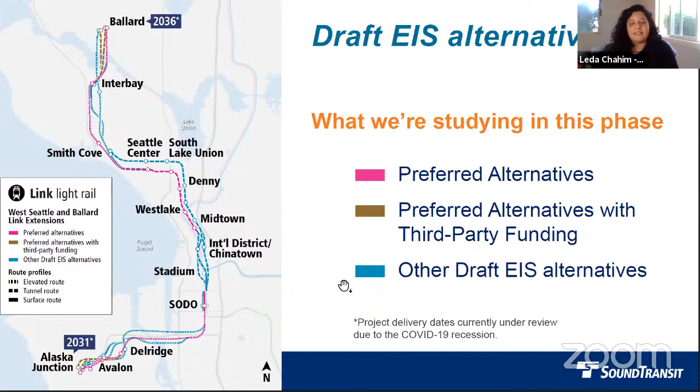I mentioned that environmental review process, the draft environmental impact statement, and that comment period. After that, our board will potentially modify or confirm the preferreds. So you see the pinks through here all along. We also have preferred alternatives identified with added scope elements, such as the tunnel crossing across Ballard, that would require additional funding based on what we knew at the time. And then we have other draft EIS alternatives as well, shown in blue.

We study them all equally in the environmental impact statement. All right, now I am zooming in to the alternatives. There are the three types of alternatives you saw before, but now north is facing to the right. I will start with the pink preferred alternative here.

This alternative exits a downtown tunnel through a portal located on Republican near Elliott. It travels in an elevated guideway north along Elliott, veering west of Elliott to serve a Smith Cove station that is elevated above the Galer Street flyover.

The alternative continues over the Magnolia Bridge, through the Armory property and between the Interbay Golf Course and the BNSF tracks, still in an elevated guideway, and then it goes over the Dravus Street Bridge and gets to an elevated station north of Dravus Street near 17th.

That's the Interbay station. The alternative will then travel northwest up to 14th Avenue Northwest and cross Salmon Bay in a high-level fixed bridge, continuing up to 14th with an elevated station there. That's these boxes here. Okay, that's one.

Then we'll go through the two preferred alternatives that are in brown. Those are the ones with third-party funding. So these are tunnel options under Salmon Bay. They both connect to the pink elevated alternatives just south of Dravus Street, but instead of going over Dravus, they would go under Dravus to have a retained cut station.

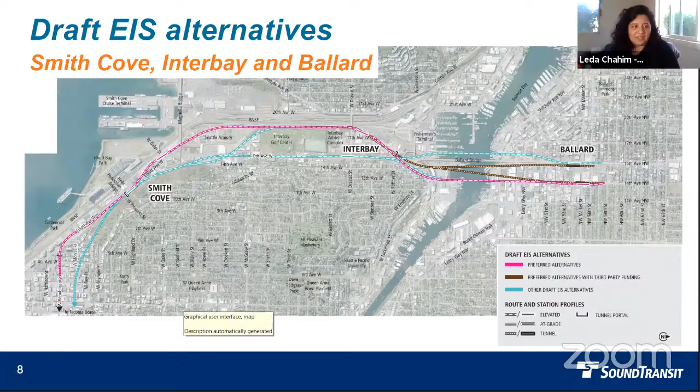For environmental review, I'll be brief since I know I just had 10 minutes, but what is an environmental impact statement? As I mentioned, it provides the agencies and the public an understanding of the environmental consequences and helps with that decision making. It looks at the range of alternatives, potential impacts, and mitigation.

And then for each of those topic areas, we look at that with an environmental justice focus as well. We are partnering with the City of Seattle on a racial equity toolkit for this project.

I will lastly mention our station planning efforts are ongoing. We are very interested in how our light rail stations interact with and support the uses around the station and how people can access those, particularly from various points and key destinations that people have shared with us.

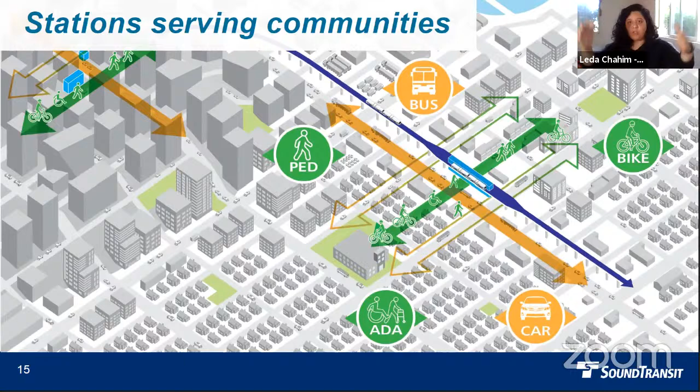We've done a lot of engagement early on this process. We've continued our agency coordination and look forward to more engagement as the draft EIS is published around stations, and next year with our city partners as well that are looking at the broader station area while we're looking at the station and the intersection between. We have lots of ways to engage, and I will just say that we're focused on preparing folks for the draft EIS publication with our online platform and briefings like this one. We'll also be engaging with potentially affected property owners in advance of the draft EIS publication, and are always looking at ways to reach diverse audiences. And then when we actually publish the draft EIS, we'll be looking at lots of different ways to engage folks to receive those comments. That'll be a really important time to engage with us.

Okay, that's everything. Thank you.

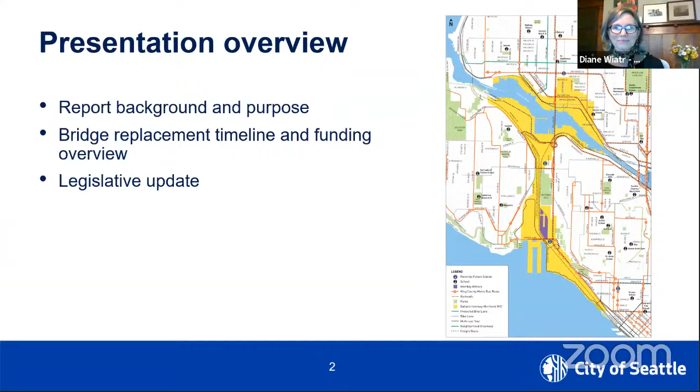All of these folks have a vested interest in the area and a vested interest in the transportation system working well. So we had an interagency team who helped us form the report.

In addition, although it was not required, we did a bunch of public outreach and public meetings. When I started this work, I was able to go to the Magnolia Community Council and have a couple public meetings at the library in Ballard in person. Now that seems like forever ago and kind of dreamy. I look forward to the time when I can be with people again.

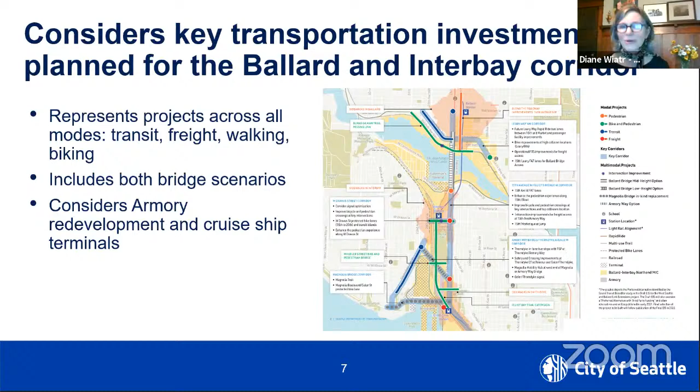In all of our analysis for transportation, we looked at 2 bridge options for each bridge. These came from the work that Wes and Matt were involved in, creating the Ballard and Magnolia Bridge planning studies. We used the low height and the mid height Ballard bridges. Both of these are bridges that open and close. For the Magnolia Bridge, we used the 1-to-1 in-kind replacement and also the Armory Way Bridge alignment alternative, which that community often called the least worst alternative to the 1-to-1 replacement.

The BIRT report does not make a recommendation of a preferred alternative. These 2 options for each bridge that we chose really were based on the best options from both a technical and public support standpoint.

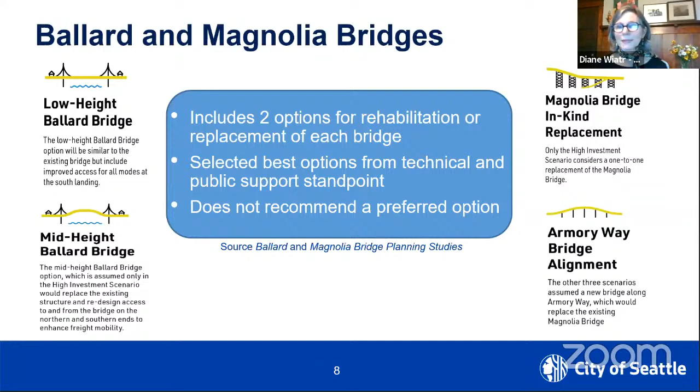The next step is a type, size, and location study. This element is required as the basis for advancing a project to the design and engineering stage, and the type, size, and location study, which takes 12 to 18 months, is required by, I believe, federal law. Matt Donahue can correct me if I'm wrong. But it's the step that takes you to design.

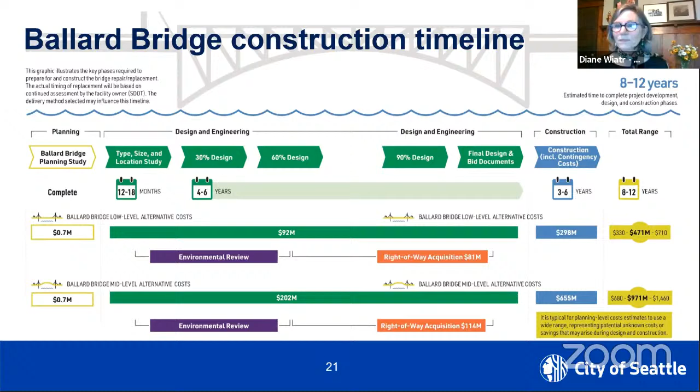We did the same thing for the Magnolia Bridge. For the one-to-one in-kind replacement, the total is about $400 million, and the Armory Way Bridge would be about $266 million.

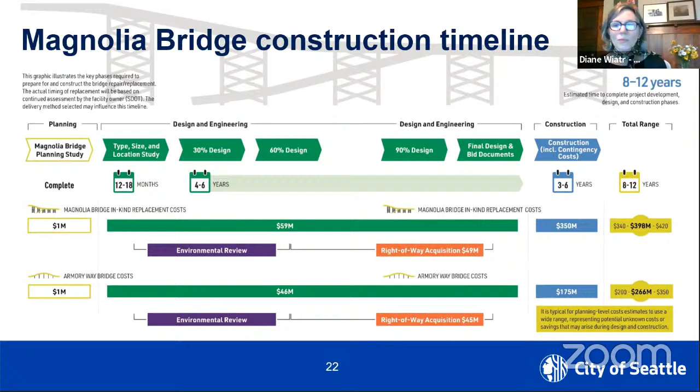The Washington State Legislature asked us to do this report. They didn't provide us any money to implement any of these projects. However, I wanted to say that the report has created a certain amount of buzz. We have briefed council members -- basically city and state elected officials -- and the word about the report and the bridges is more pronounced now.

Large bridge projects like Magnolia and Ballard, cities can't afford to pay for them themselves. We will require federal funding and state funding. And so the report is a good step to getting us there.

I have to say that your state legislators should be commended for working really diligently this session. They initially had $54 million in the budget, both in the House and in the Senate, to do the type, size, and location studies and some environmental work for the bridges. There were a number of iterations of budget bills and transportation bills, and the $54 million stuck for a while. But what didn't happen was there was not a new transportation revenue package that was passed, and that would be a necessary step to get to this kind of a price tag for the bridges.

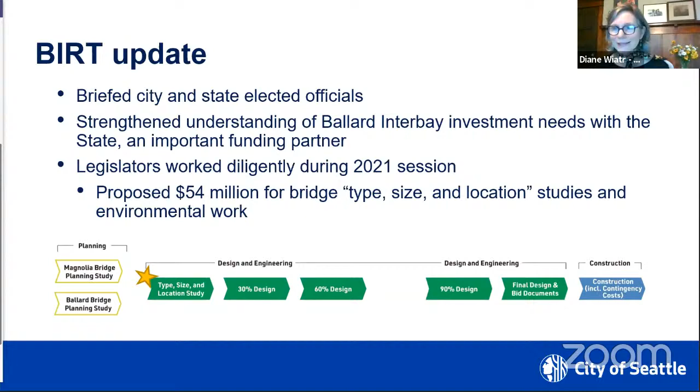When legislative session started, there was conversation about possibly increasing the gas tax, and about some big projects, a bunch of electrification projects, bridge projects. But broader political issues made it so that individual legislators could not have gotten beyond what happened this session. But these bridges have had a voice. They've come up and would be more likely to be funded in a future session when there was additional revenue. So with that, I'm going to take you from the politics of the state to Matt Donahue, who deals with bridges on the ground at the city of Seattle.

Thanks, Diane. Just bear with me a minute here. I had a couple of technical difficulties. I lost access to my microphone and camera when I started sharing my screen for some reason. So just bear with me. They're coming through just fine for us. And good, thank you, fine. We're not uptight or formal. There you go.

It's working. All right, and hopefully those controls will go away. So good evening, everybody. My name is Matt Donahue. I'm the Roadway Structures Director, Division Director for Seattle DOT. Happy to be joining you here. I am also a resident of Ballard, so I'm not sure where everybody is at, but we're probably right down the street from each other. Let's see.

So what I'd like to talk about with you today is just a brief overview of the Roadway Structures Division. We were joking earlier about whether or not I'm a division director or a manager. When I started the job, I was a manager, and SDOT saw fit to make Roadway Structures its own division. So we used to be coupled with the Capital Projects Division. And now we are in the same portfolio as Capital Projects and Project Development, but we are our own dedicated bridge and other roadway structures division. And that only goes back to October of 2019.

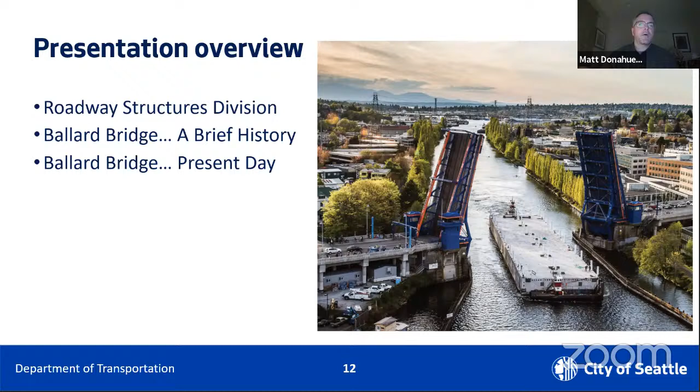And then I also like to give just a really brief history of the Ballard Bridge and then talk about what is going on with the Ballard Bridge today.

So the Roadway Structures Division, we've got about $8.3 billion worth of inventory. So 124 bridges, 613 retaining walls, 502 stairways, and 238 areaways, which I usually say, because most people say, well, what's an areaway? And I say, oh, if you've ever done the underground tour in Pioneer Square, then you know what they are. But there's quite a few areaways here in Ballard, so I get to actually say that because you folks know what that means. So we are responsible for all these assets for maintenance and operation.

The way that we're structured is there's basically four main groups inside of Roadway Structures. So we've got all of our movable bridge operators, our structural engineers and inspectors, our structural maintenance team, so we've got 7 union tradecraft groups in our division: mechanics, electricians, concrete finishers, carpenters, installation maintenance workers. And we've got our leadership team, so myself and the managers that work with those other teams to lead the whole division.

And one of the reasons I decided—I was in consulting as an engineer and commercial diver for about 26 years—one of the reasons I decided to come to SDOT is because most of my clients when I was in consulting had bridge operations, bridge inspection, and bridge maintenance completely separate. And it's a real advantage here, much to the chagrin of my other DOT counterparts throughout the region and the country, that we're in the same division. We get quite a bit of efficiency out of that.

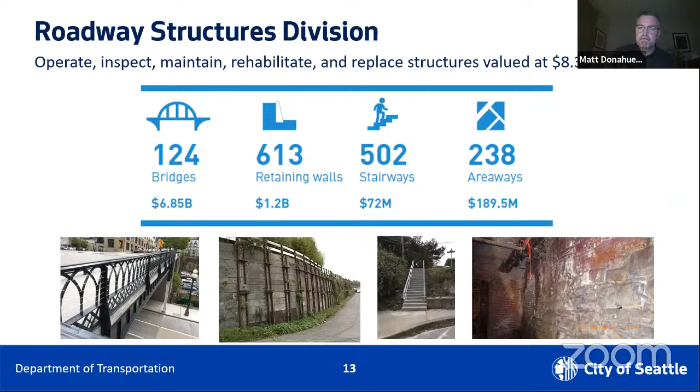So we take our work seriously. I've been with Roadway Structures for 3 years, and with the DOT for 4. Most of my colleagues in Roadway Structures have been here 20 plus years. You've got maintenance and engineering professionals - our engineering supervisor, Anela Mola, I think he's coming up on year 35. These are a pretty talented group of individuals who've dedicated their professional lives to the city and to the bridges and other structures throughout it. I find it a great honor to lead that kind of a team and to be part of it.

Some examples of work going on right now: we've had 2 new bridges within the last couple of years. The Lander grade separation got completed recently. The need for the Lander grade separation was first mentioned in a railroad franchise charter in 1910 - so sometimes it can take a little bit longer to build a bridge.

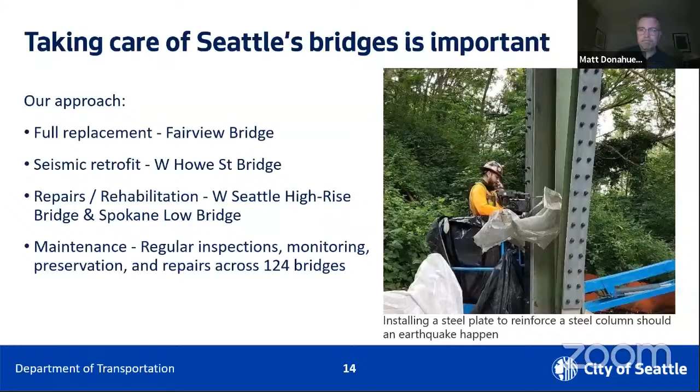So onto the Ballard Bridge - I love working on movable bridges, it's one of my favorite parts of this job. It's also really difficult and complex because they are complicated structures and they're really old. But if it wasn't for problems and challenges, I wouldn't have a job, so I do like working on these things. It's also really interesting, and so does the rest of the team.

I know that the bridge operators - at least one of them is a commercially licensed vessel captain. Bridge operators are at the nexus of two things: the marine waterway and the transportation network for vehicles, so they're responsible for safety of both. They go all around the city to cover shifts, but they do tend to work at specific bridges most of the time, and they are very proud of the bridges that they operate.

So in 1917, the bridge opened. Several different upgrades through the 30s, 40s, 50s, and 60s, with a major mod to the bridge control tower in 1967. I actually didn't realize this until I looked this information up for the presentation - I thought they'd had a timber pier protection fence out there for a lot longer than 1970. That's a little frightening to me.

It went onto the National Registry of Historic Places in '82. The first seismic retrofit was in '94, then a big mechanical electrical rehabilitation in 2002. And the most recent major effort up there was the painting of the steel sections of the structure, the bascules and the steel approach section, in 2012.

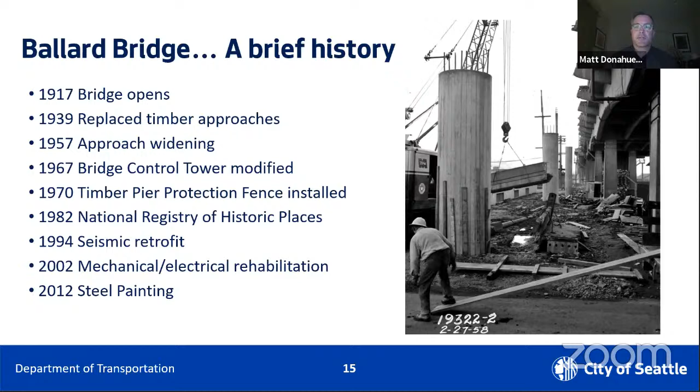Many years before I came to Roadway Structures, the folks that ran the group at that time decided that as the bridges aged, they needed to increase their mechanical and electrical contingent of mechanics and electricians. So our mechanics and electricians go out to every movable bridge - the 4 that the city owns and the 5th, South Park Bridge, which we operate for the county - every month.

There's a regular checklist they go through every single time. The electricians look at the electronic control systems that run from the control tower, from the control station through the PLC, or programmable logic controller. It's kind of the brain, or capacity protection, in between the control panel and the actual motors and machines that run the bridge. They go through all the motors.

We have backup generators, 2 backup generators on every movable bridge. We actually bring in a contractor to come in and maintain those on a monthly basis.

In 2019 and 2020, as we mentioned, there was the Ballard Bridge planning study. Part of that bridge rehab and replacement sub-program was around $10 million for the studies, and then there was somewhere in the neighborhood of about $5 million dedicated to bike safety on bridges throughout the city. That was something that was teed up as part of the original levy, and I think perhaps Councilmember O'Brien had a hand in that.

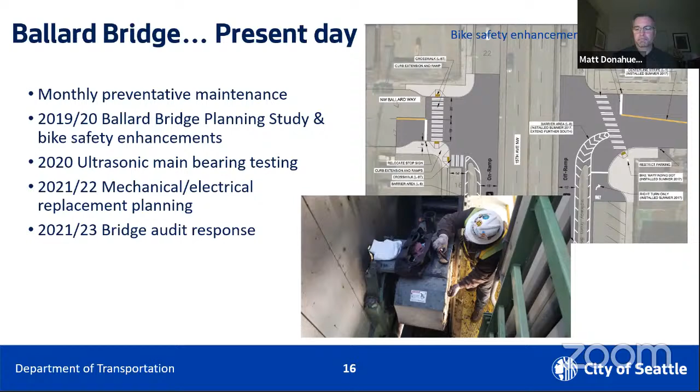With that, I'll take a knee and pause for any questions for myself or for Diane.

Let me see if I can put this on the screen. I see that the BIRT calls the Ballard Bridge in fair condition, which, when you look at what Diane said about 500 - let's call it $500 million to $1 billion - bridge need there, and you put it in line behind the much more significantly problematic West Seattle Bridge and the Magnolia Bridge - does that mean, if it's in fair condition, we've got a while to go? Or do we not really know until we do this next really detailed engineering study on all the componentry and a more structural technical study?

No, because the life cycle cost analysis hangs heavily on your element-level condition data, but we do have the data. So when we end up with a rating for a bridge of good, fair, or poor, we can accurately say that about the bridge itself. And if you look into the report - every state uses a reporting system - you go out, do your inspection, collect your notes, take your pictures, come back to the desk, and enter all that data into a reporting system.

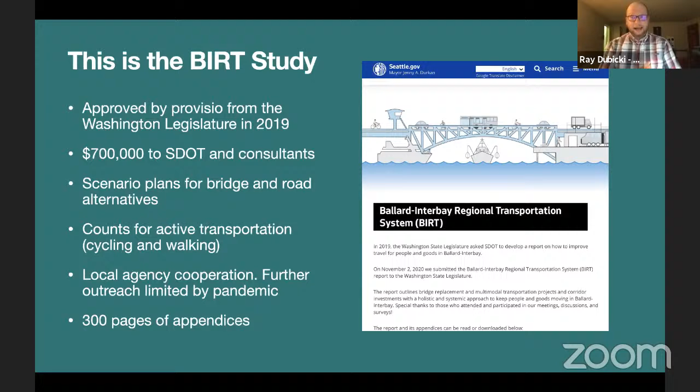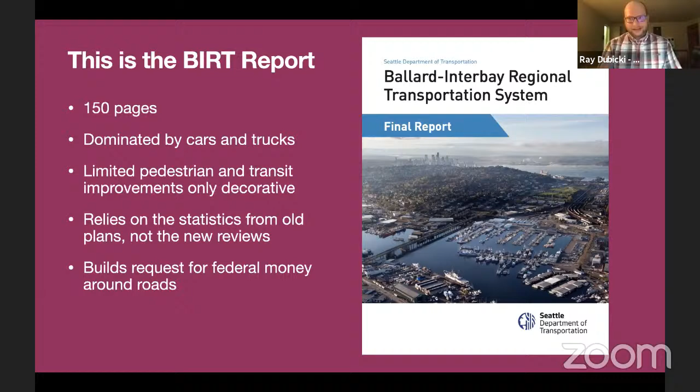Unfortunately, the end reports didn't work as well. The final BIRT report and the Ballard Bridge reports shoved all the good stuff into appendices and came up with a $2 billion highway wish list. Bikes and buses show up, but really only as garnish. The study and the report don't connect.

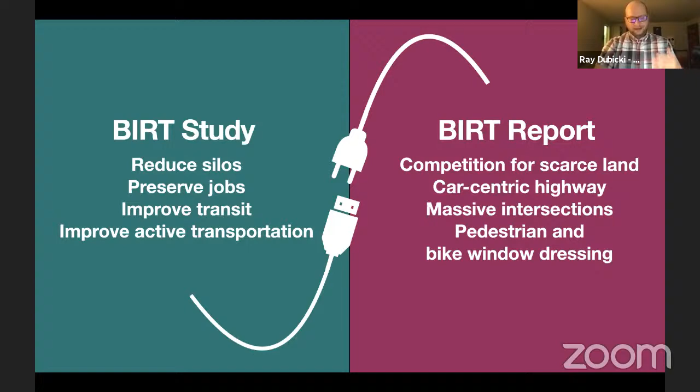To understand that disconnect, we have to understand one really important fact, a fact that everybody seems to know but keeps dropping: 15th Avenue is a dangerous highway. Since 2005, there have been as many accidents on that stretch of 15th Avenue as on the same stretch of Aurora and on the same stretch of Interstate 5.

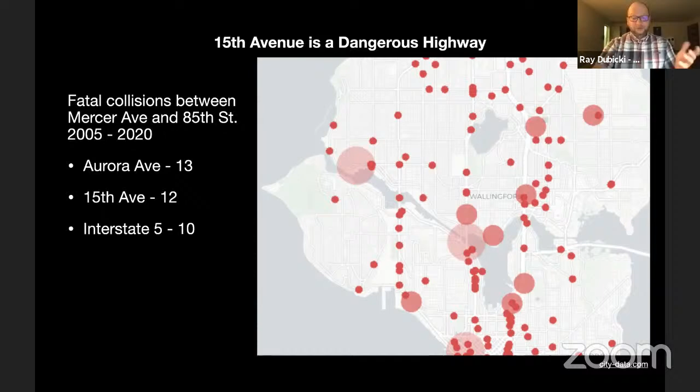I was in Ballard Pediatrics when that building was actually struck by a truck coming off of 15th. This is not an accident. This is the design of the road. It is built for speed, as anyone who has ever tried to drive the new 35 posted speed limit on Interbay can attest.

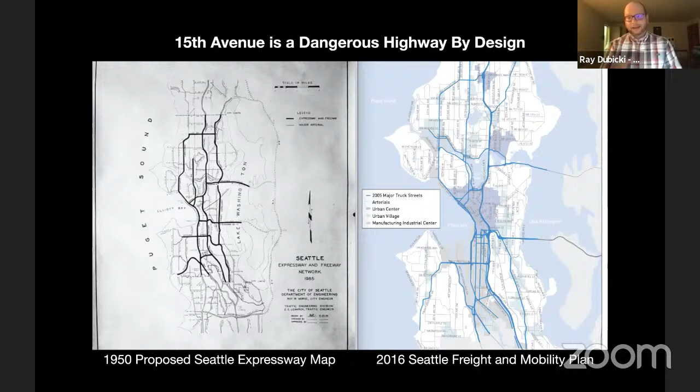That design comes from way back. In the 1950s highway plan for Seattle, on the left, there was an outline of making 15th through Ballard a highway. Parts of that were scrapped—the Thomson Expressway on the east side was shelved in the freeway revolt—but parts of it were carried through. And the 2016 Seattle Freight Plan, on the right, is the same plan. Plans like this are cornerstones of the BIRT study.

Highways like 15th have been baked into all the plans the city has developed since the 1950s. Here's the list of plans included in the BIRT report. Like the freight plan, each one recognizes that 15th is a dangerous road, a barrier to the neighborhood, and works to route around it in some way. Even as Ballard and Interbay are not the same communities they were when the 50s highway plan was developed, that highway plan still shows up in all of our current planning.

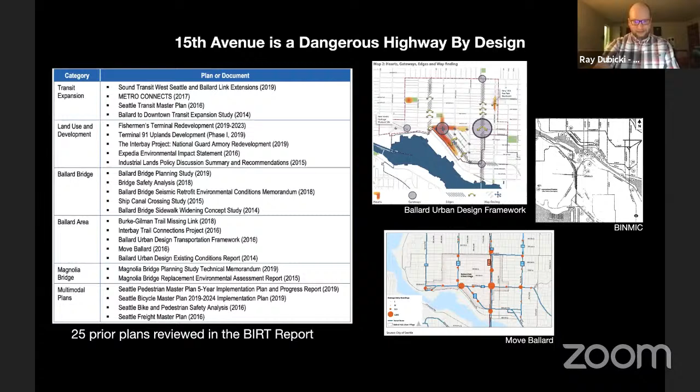But instead of considering how to move away from oversized, dangerous roads, the BIRT report borrows those old numbers. We've seen a drop in the number of cars using the Ballard Bridge even as Ballard has grown, yet the report recommends building a bridge that can handle 20% more cars than the bridge has ever seen—ignoring Sound Transit to come, ignoring bus improvements, ignoring work from home—a 20% larger bridge based on these numbers.

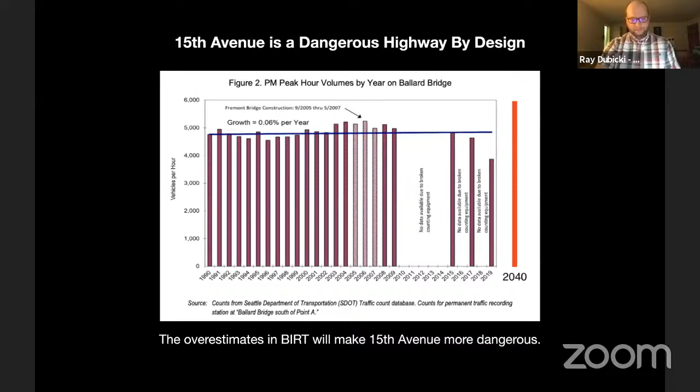And this has real impact on the ground. To handle 20% more cars, the proposed bridge designs have a massive intersection at Emerson and Nickerson. Then in the north end in Ballard, the alternatives range from keeping the current tangle of ramps, to demolishing Pono Ranch with a flyover, to dropping the landing of the bridge on Market Street.

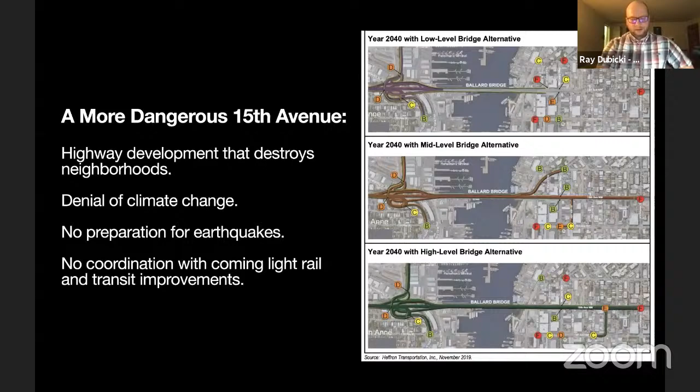Let's talk about that Emerson-Nickerson interchange. It's a suburban cloverleaf shoehorned into the tight confines between the railroad and the ship canal. This wouldn't be necessary if BIRT didn't have to overbuild and accommodate these wrong numbers. Don't forget, there's a bus stop somewhere in this tangle, and kids are supposed to get on the bus there and go up to Ballard High.

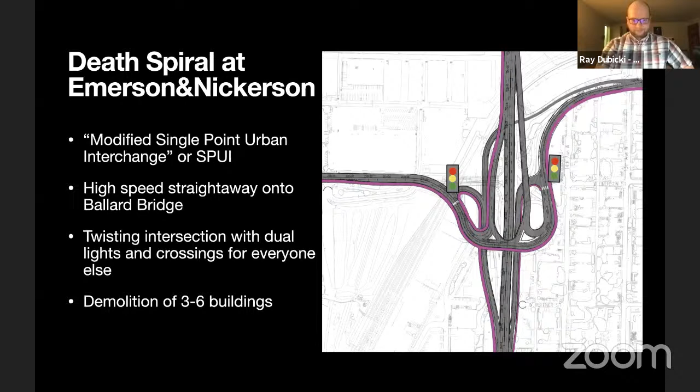The death spiral emphasizes how pedestrians and bikes are way down the priorities list here. Coming up 15th Avenue, pedestrians are supposed to go around the entire interchange to get to a sidewalk that's only on one side of the bridge.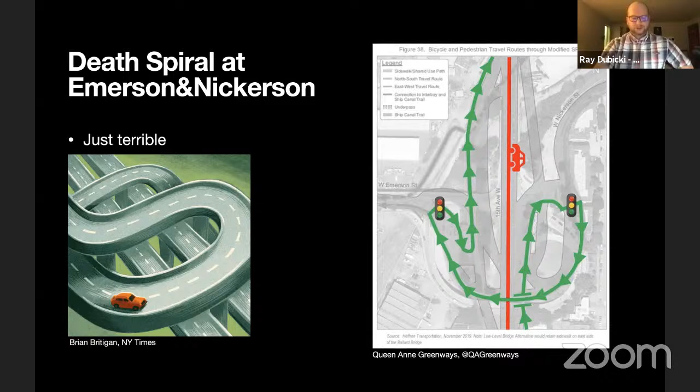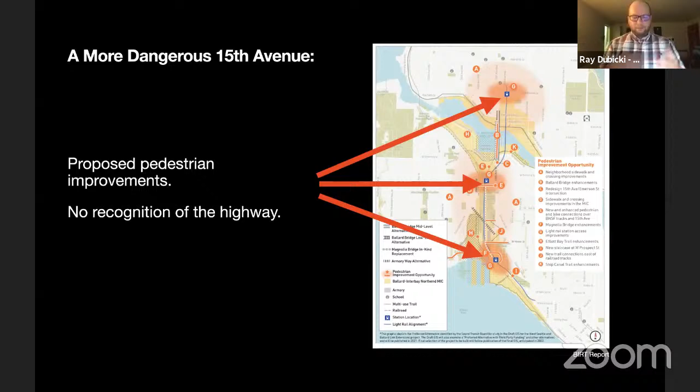And that's the problem with the overall BIRT report. It's one-sided, tilted towards $2 billion in highway expansion. BIRT proposes orange clouds of pedestrian improvements, but they are drawn across a map that doesn't show how dangerous the highway is, or its noise, or its pollution, or how it's a barrier to everybody who walks or rolls, and how it divides our neighborhood. By rehashing these old plans, the Ballard Bridge study and the BIRT study reports became their own barrier to a future of anything but traffic.

So for all of these reasons, Share the Cities and our organizing partners are making a fairly easy request: let's get the right numbers, not ones steeped in years of highway building, but something that recognizes the neighborhood we live in today. We have a chance, given the city is updating its comp plan over the next three years. Let's do the new comp plan, revisit BIRT and the Ballard Bridge, measure accurately before spending $2 billion on roads we don't need. Take a pause and make the right decisions.